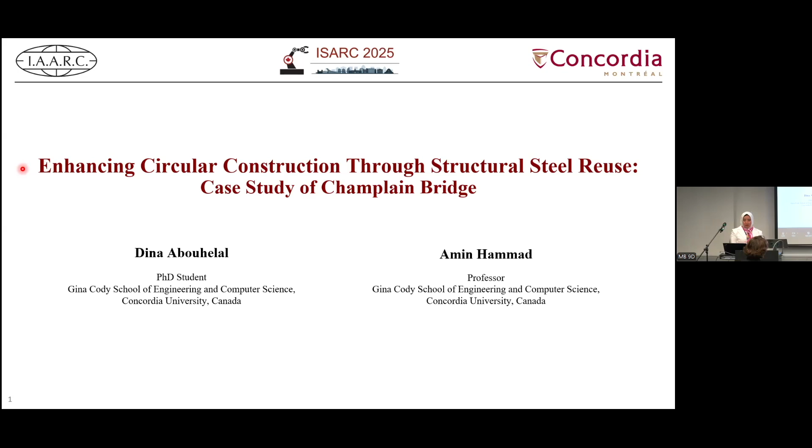My research paper is titled Enhancing Circular Construction through Structural Steel Reuse. This work was carried out under the supervision of Professor Amin. This is the agenda of my presentation.

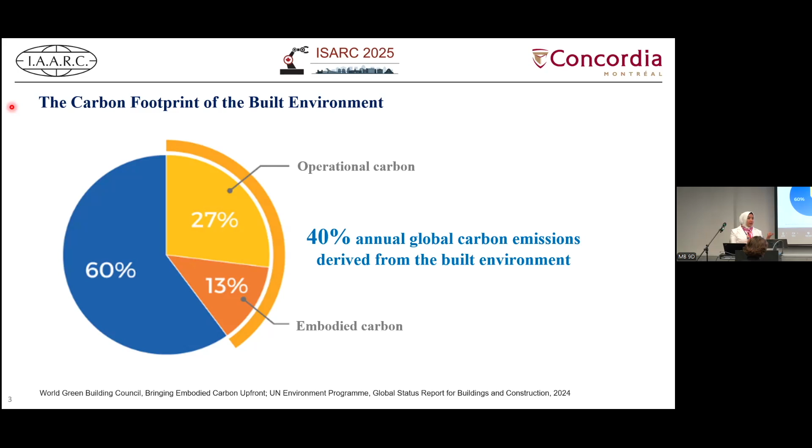Based on the evidence in the United Nations Global Council, the built environment is responsible for 40% of the annual global carbon emissions. There is an urgent need to address carbon emissions across the construction life cycle. The current practices in the construction industry follow a linear supply chain without consideration of the end-of-life phase of construction.

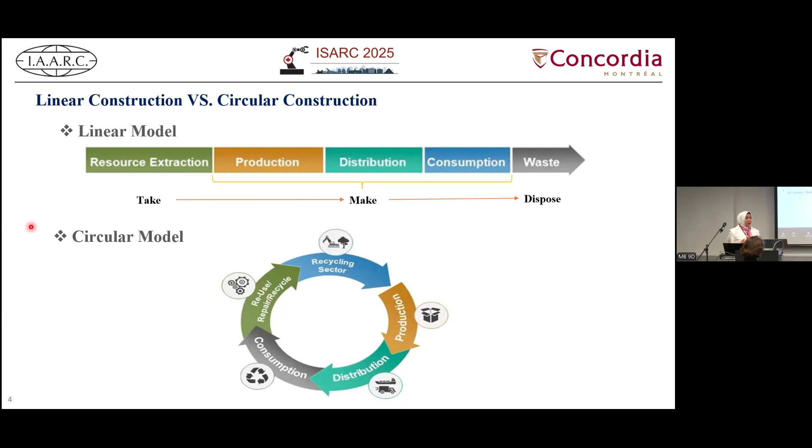So there is a need to change this model to a circular one that keeps the resources in use and minimizes waste and reduces the environmental impact. Here, deconstruction is a key driver by maximizing the recovery of structural components at the end of life. This is the full process of deconstruction, starting from the donor structure to the receiver structure. Following deconstruction, recovered materials are either reused or recycled.

While recycling structural steel is widely utilized at the end of life, it entails energy-intensive processes such as steel melting and fabrication, which elevate energy consumption. In contrast, structural steel reuse presents a more sustainable option, requiring minimal configuration and reducing the embodied energy and greenhouse gas emissions.

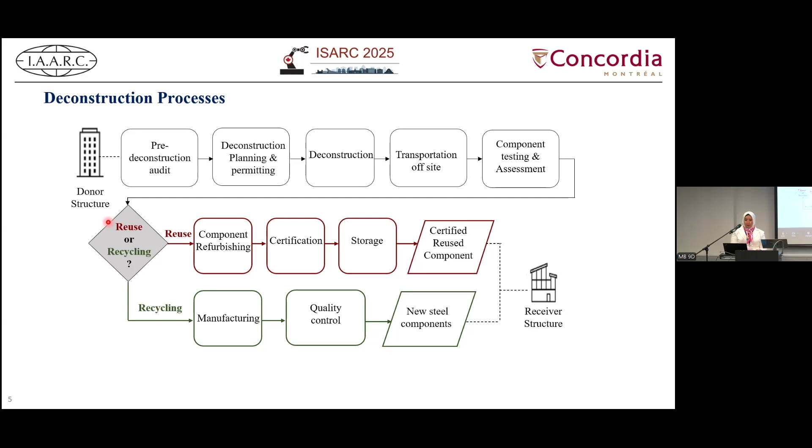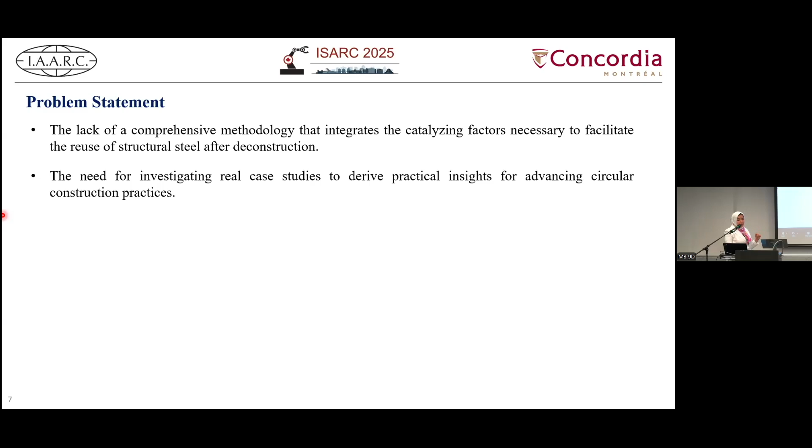Several studies have been conducted in advancing deconstruction at the end of life. However, there is a lack of a comprehensive methodology that integrates the catalyzing factors necessary to facilitate the reuse of structural steel after deconstruction. So, based on that, our research objectives are promoting circular construction by developing a framework, analyzing the potential application, and proposing future directions.

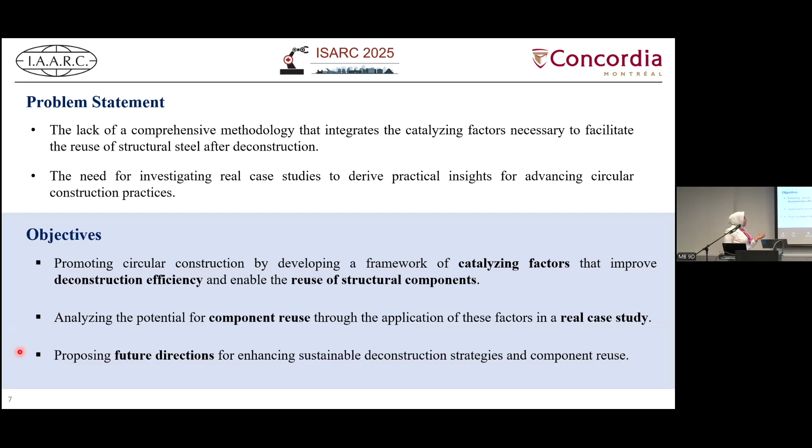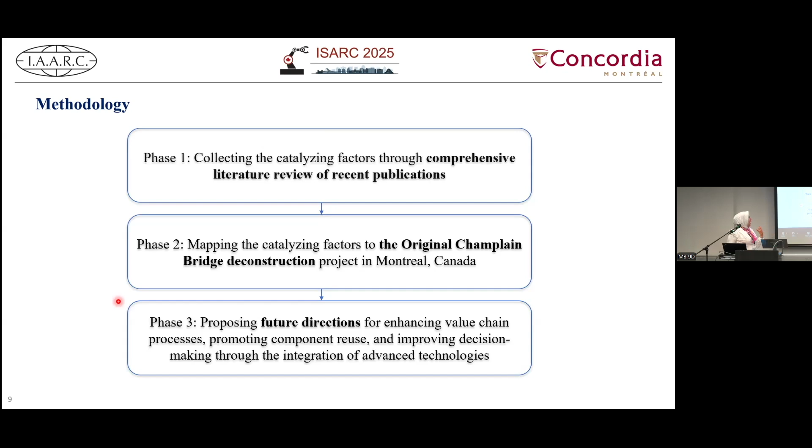Phase number one, the catalyzing factors. For better identification and analysis of the catalyzing factors, we grouped them into 5 clusters: structure attributes, business attributes, value chain activities, project management, and regulation. Each cluster includes related factors and sub-factors. Due to the time constraint, I will not go into details on every factor, but just as an example.

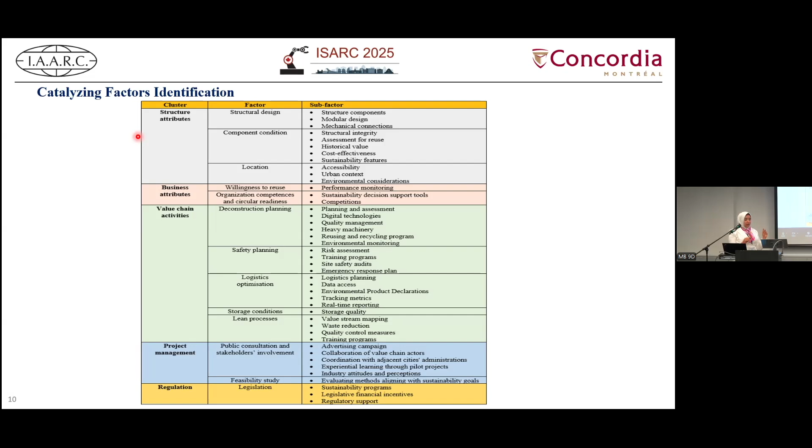Take the structure attributes. The key factors include the structure design, the component condition, and location. And the sub-factors go into more detail, like, for example, whether the structure components are modular, whether mechanical connections are used, the integrity of the structure, how accessible it is, and its urban context, and so on.

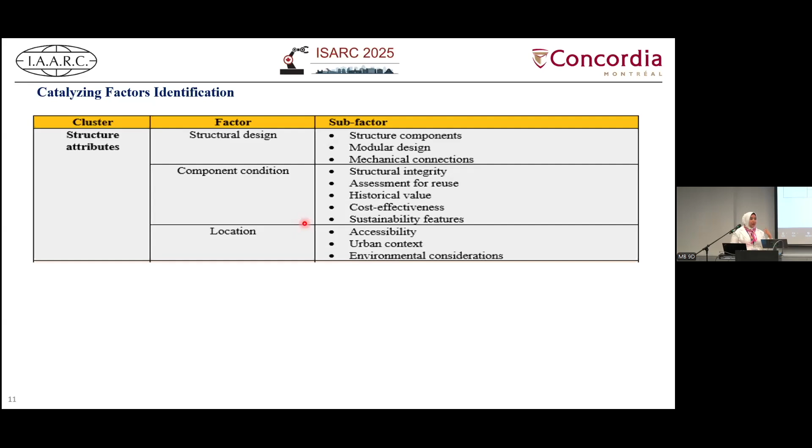The selected case study of our research is the original Champlain Bridge deconstruction. This bridge was one of the largest infrastructure projects in North America. It was built in 1962. The main issue is a severe corrosion which compromised the structure integrity.

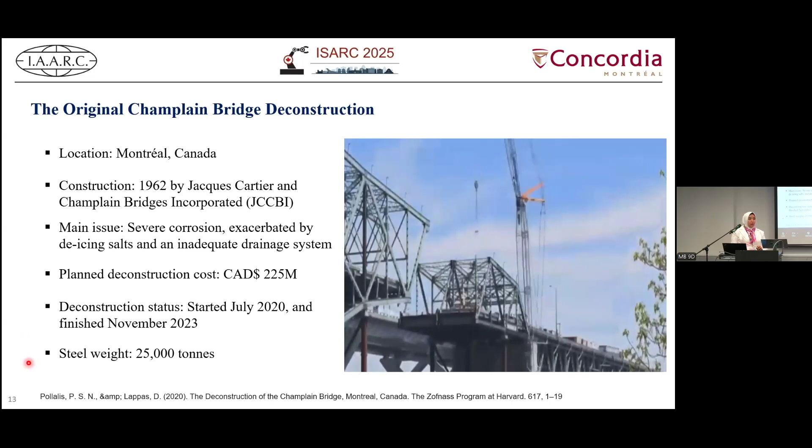The planned deconstruction cost was $225 million Canadian dollars, and the deconstruction started in July 2020 and finished in November 2023. The total steel weight was 25,000 tons. For the case of the Champlain Bridge, several factors and dedicated efforts have been conducted to facilitate the deconstruction and promote the use of structural components at the end of life.

For example, for the structural attributes, the main part of the original Champlain Bridge is a steel truss structure, which enables the recovery of 413 standardized components for reuse. Also, the mechanical connections facilitated the component separation using techniques like heat cutting for large elements, unbolting, and removing rivets.

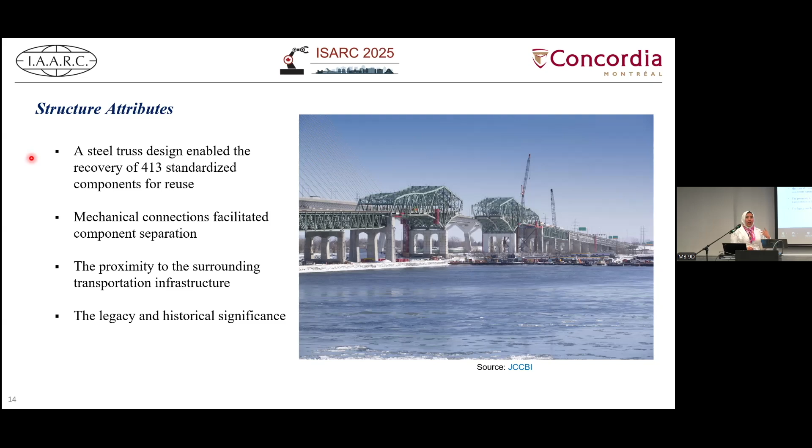Also, the proximity of the bridge to the surrounding infrastructure facilitated deconstruction logistics, making the removal and the transportation of materials faster and more feasible. Furthermore, the bridge's legacy and historical significance increased the appeal of the salvaged components and promoted their use in heritage

and commercial projects. For the business attributes, they set sustainability targets for handling and transportation, emphasizing the reuse of components rather than traditional recycling. Also, they implemented continuous performance monitoring to improve the project's profitability. Furthermore, a sustainability support tool was developed to evaluate the deconstruction method, we would have the value chain activities. They enhanced logistics by implementing a phased deconstruction.

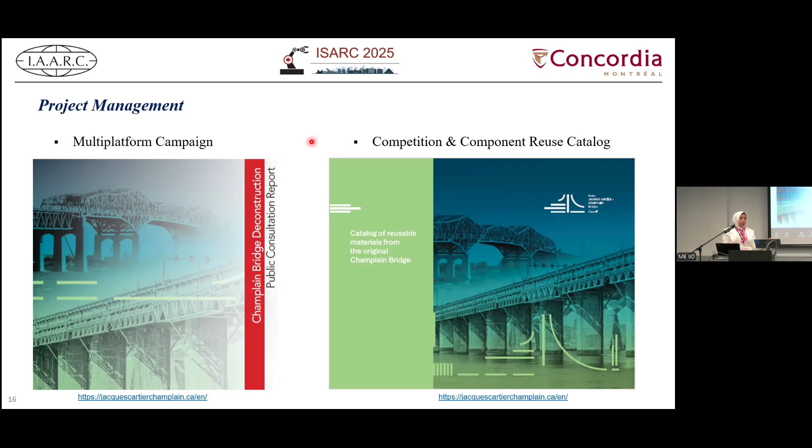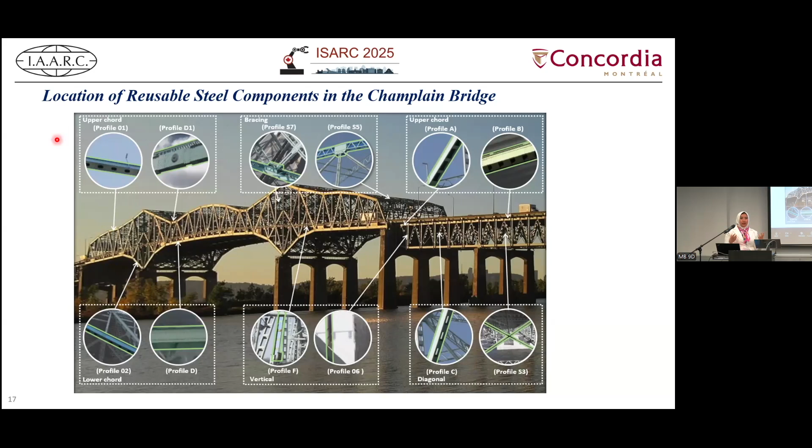We have data provided in the catalog to gain some insights related to the quantities and the weights of reusable components. And as we can see, there is a variety of steel profiles distributed across different locations of the bridge, which reflect their different applications and different structural roles. This is an example of the data provided in the catalog for profile 01. As we can see, for each steel profile, there is some information like the function for each component, the length, the weight, the height, the available quantity, and the price.

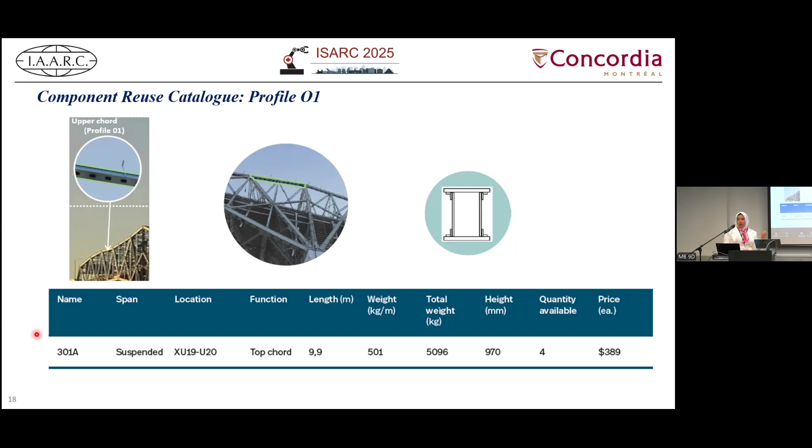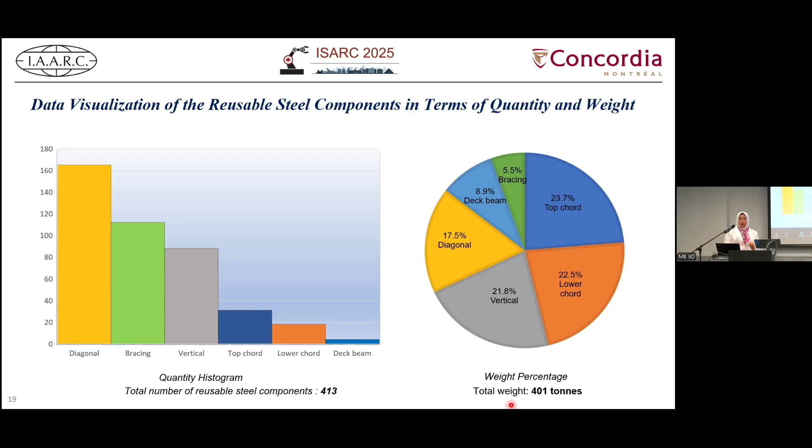This histogram presents the distribution of the reusable steel components in the bridge. As we can see, the diagonal steel members are the most numerous, totaling around 165 out of 413. And in terms of weight, the total steel weight is 401 tons, and the top chord members have the largest proportion.

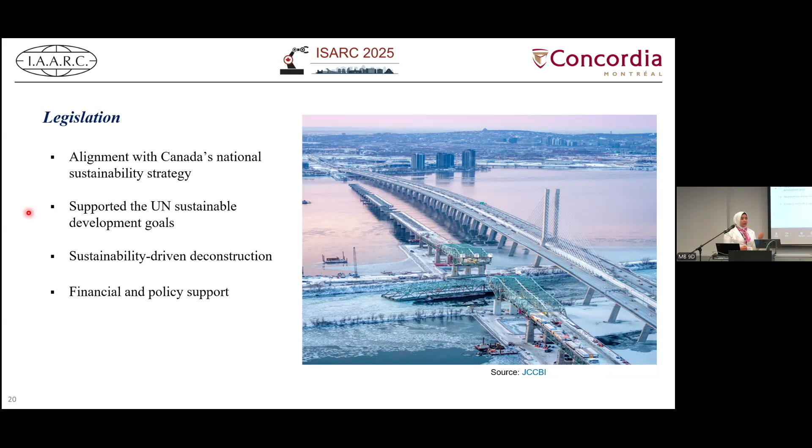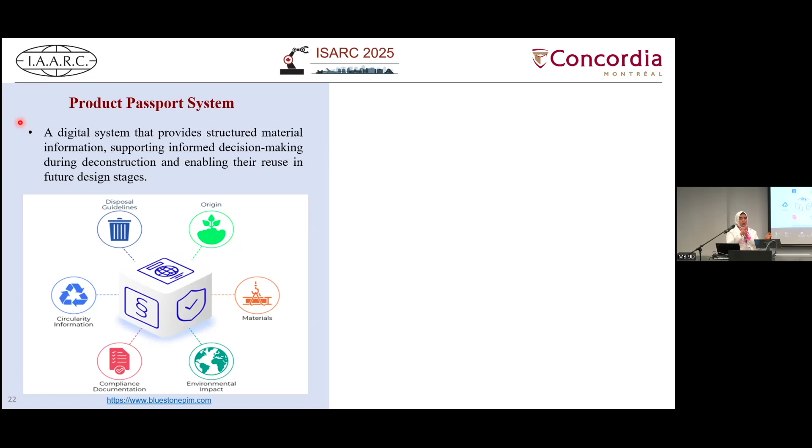So, to enhance the deconstruction process, maximize the component reuse and support the decision-making at the end of life, future research could focus on advanced technological initiatives, such as evolving a product passport system, which is a digital system that details the information of each material component that exists in the structure. So it has the potential to maximize the recovery of structural components at the end of life through matching the deconstructed project elements with new construction projects.

Also, virtual and augmented reality can enhance the deconstruction process through simulating the deconstruction scenarios and understanding the best practices for handling components, improving safety, and maintaining the integrity of reusable components.

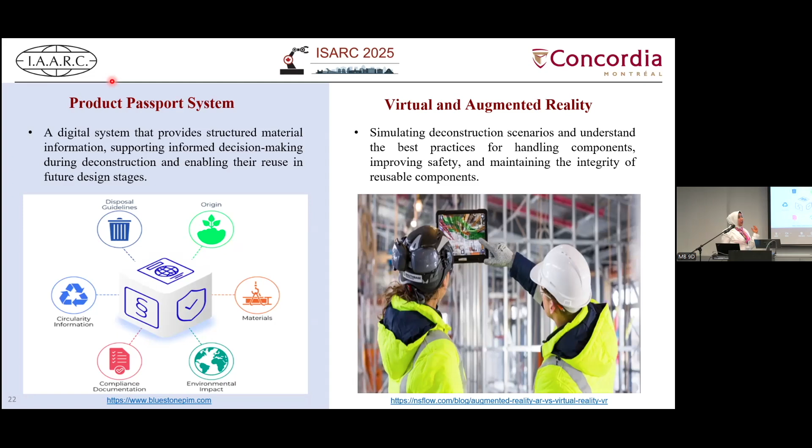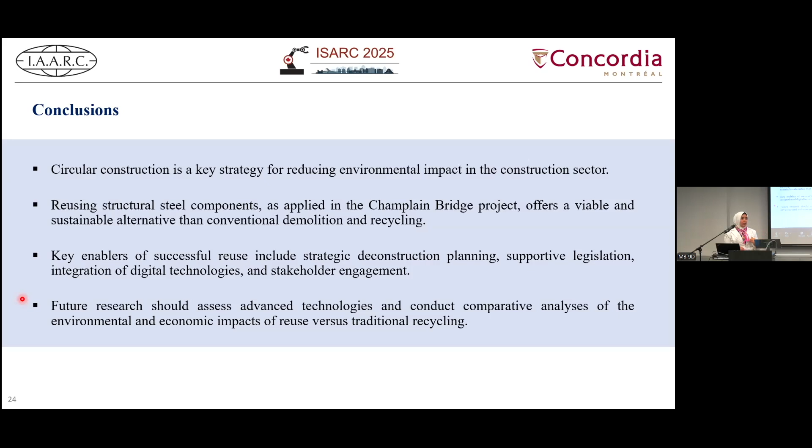So to conclude, circular construction is a key strategy for reducing environmental impact in the construction sector. Reusing structural steel components as applied in the Champlain Bridge project offers a viable and sustainable alternative to conventional demolition and recycling. Key enablers of successful reuse include strategic deconstruction planning, supportive legislation, integration of digital technologies, and stakeholder engagement. Finally, future research should assess advanced technologies and conduct comparative analysis of the environmental and economic impacts of reuse versus traditional recycling. Thank you so much, and I welcome any questions.